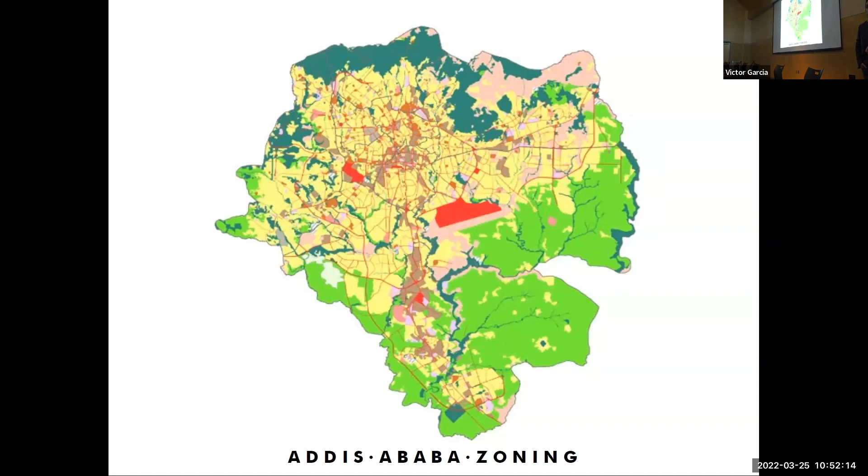But I prefer to see Addis Ababa with this image, because Addis Ababa is not like here in New Orleans, where we have just one big river. In this case, as you can see in this image, Addis Ababa has a lot of small rivers and tributaries. So this is what we call Addis Ababa River City, and that's what we will work on.

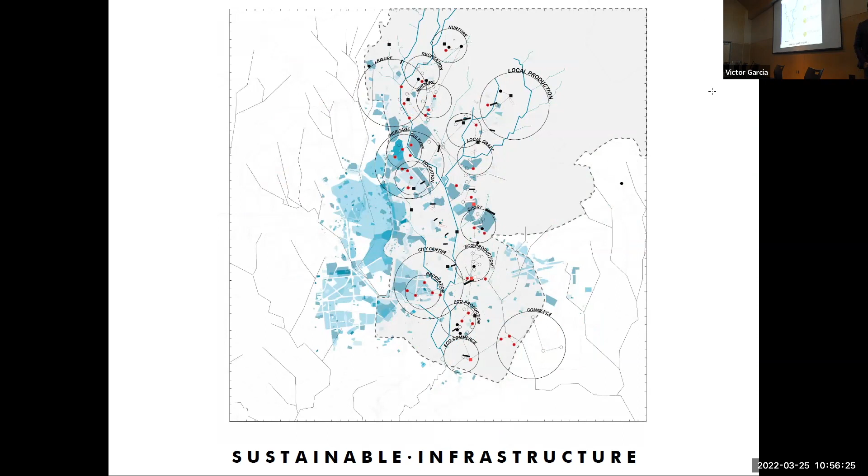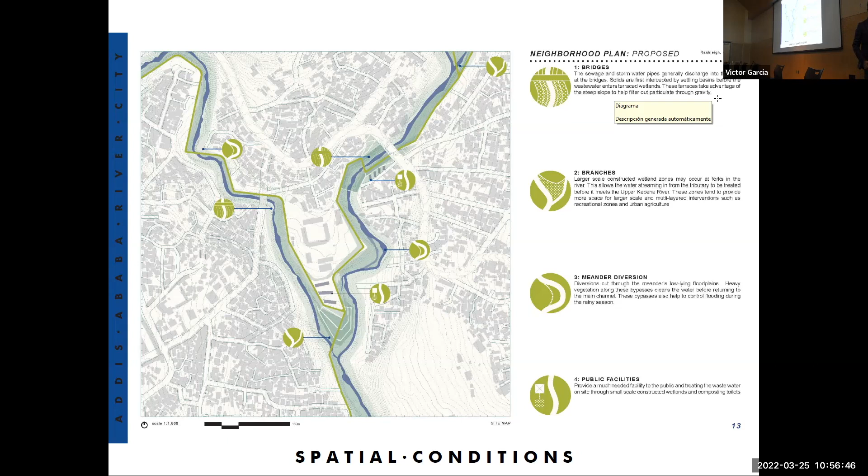That's why in the next step we designed a strategic plan for the Upper Kebena River project. Then, in a following step, we also designed some urgent interventions at critical points along this river. We focused on four different spatial conditions: bridges, branches, meanders, and public facilities, which in this case will be green and blue infrastructures in a more urban condition.

Just a couple of examples to show you the work the students did this last semester. This is one network of blue and green infrastructure we designed for a specific part of the Upper Kebena River region. The idea was first to address some of the urban issues we highlighted at the beginning in the diagnosis.

In this case, specifically urban flooding and water scarcity. The idea is to redraw the streets, remove some lanes currently used for cars, and give more public space and space for pedestrians, while also designing a blue and green network that can absorb urban flooding and, in a more natural way, send it into the natural cycle or directly to the river.

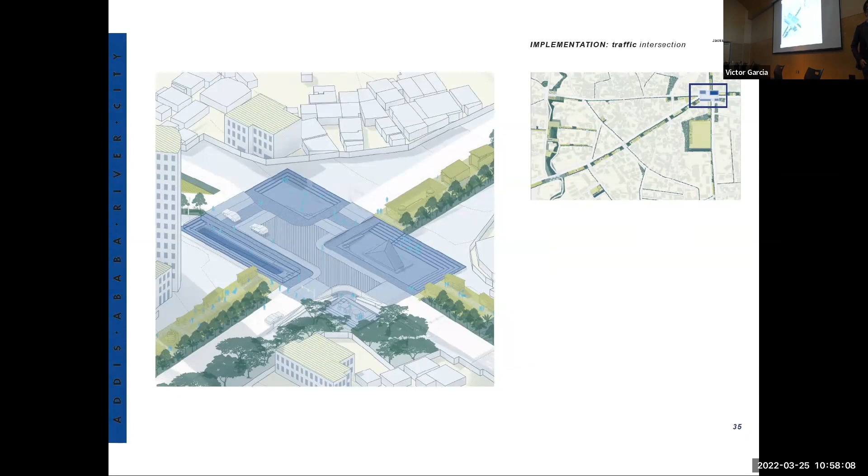There are some nodes, for example these water plazas, that can be public space when we don't have rainy moments, but can also serve as collecting spaces for water that we can then slowly clean and send directly to the river.

There are also other spaces, urban pockets, where we can implement other basic facilities, since the city of Addis Ababa has a lack of public facilities. In this case, it's a soccer field because one was already there. What we're trying to do is gather and collect water from there, clean it on the edges of this soccer pitch, and then slowly send it again to the river.

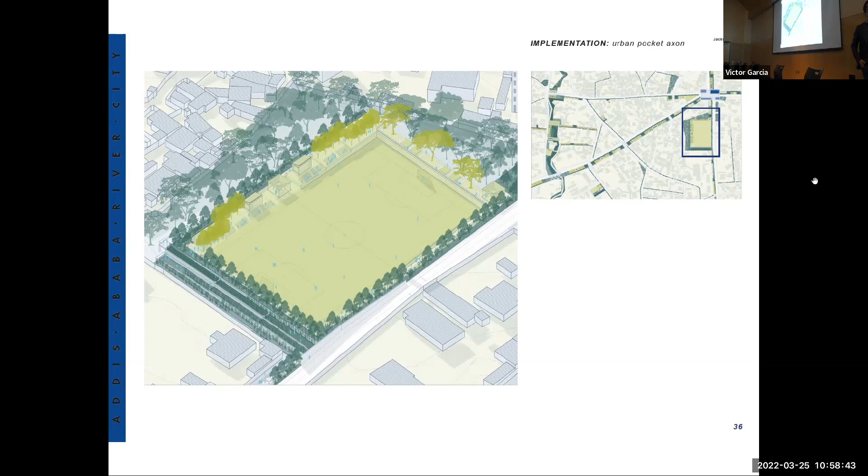And then, as we get close to the rivers, with a natural-based step situation, we try to clean as much as possible of the water we're collecting from the urbanscape before we send it back to the rivers.

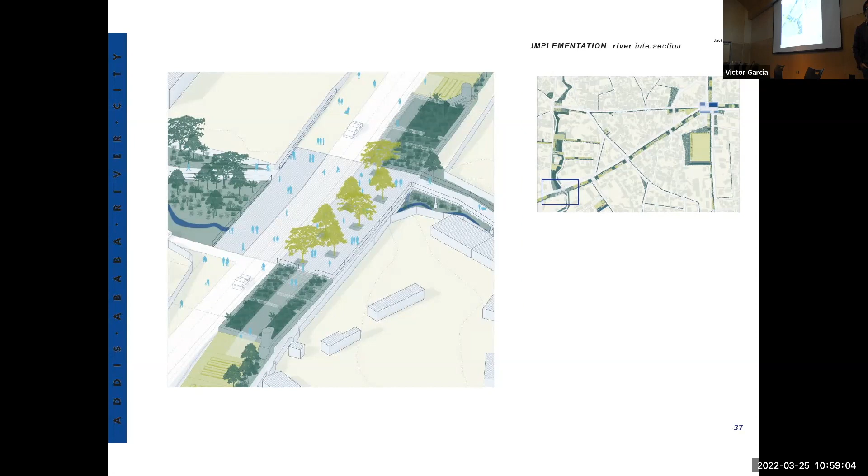Another idea is to bring public spaces, facilities, and activities close to the river, because nowadays most of the city turns its back to the river. We wanted to flip this situation.

This is another example, the second one I'm going to show you. Here the main idea is to address connectivity, because in many cases, due to a lack of a greater number of bridges, neighborhoods that are very close in physical distance are actually very far from each other.

So in this case, we designed this hybrid infrastructure that is at the same time a bridge, but also absorbs part of the housing we are going to relocate, since some of it is built in the buffer area and is in danger, especially during flooding. It also includes a market to give citizens an economic component.

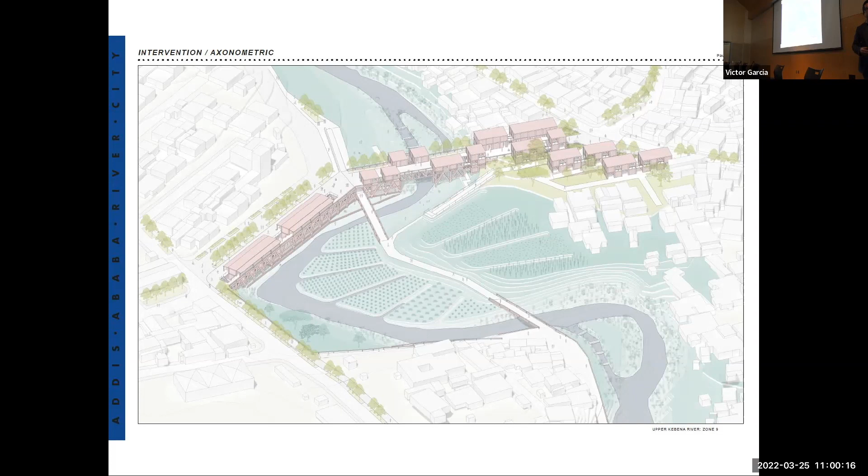Also some urban agriculture that can absorb part of this urban flooding and clean the water. Just some images to show you this other proposal from another student.

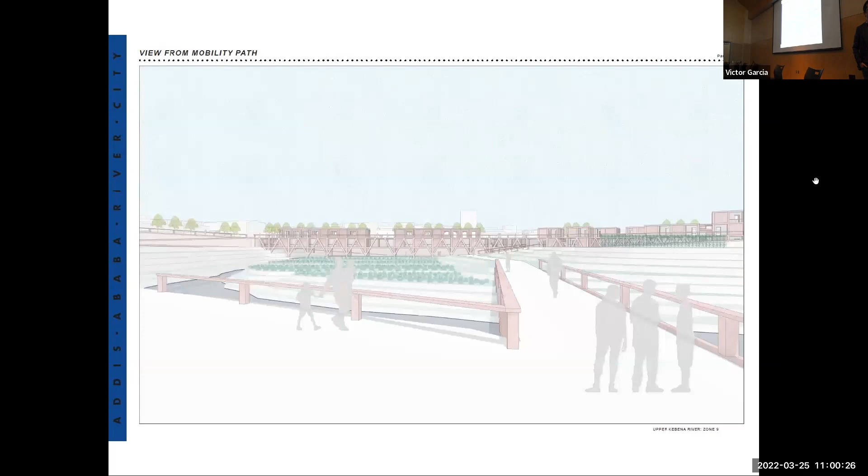A very last photo to tell you this is also part of this research studio of the Sol Means Global Studios, and there is a grant that allows us to travel to Ethiopia. This was just two years ago, before the pandemic, but hopefully the situation will change. I want to highlight that with this studio there is also an opportunity to travel, visit, and have direct contact with the problems we work on in these research studios. Thank you.

Good morning, everyone. Today I'm going to present the following research studio, which is the future of urban ports, and it happens here in New Orleans.

Before that, I just wanted to present myself a little bit. I'm an architect, trained as an urbanist, and I work in landscape architecture as well. I teach at the School of Architecture, and I have an office open in Barcelona and New Orleans, doing several scales of projects from architecture to landscape. I teach research studio, collective housing, and site strategies.

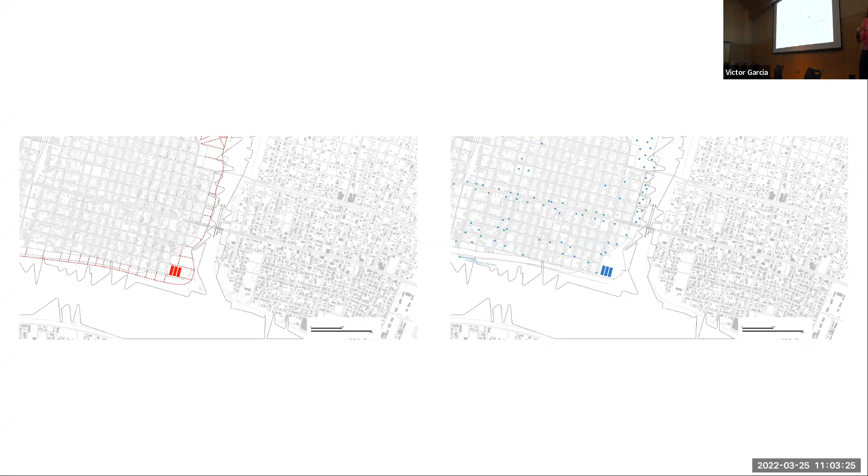In terms of just starting off with an example of a project in the industrial canal of New Orleans, we study, as Ruben was mentioning, the urban scale. We do diagnosis of the places, and then we propose architectural projects that manifest at the detail of what you can see here, which is a 1 to 200, and even in some cases more detailed.

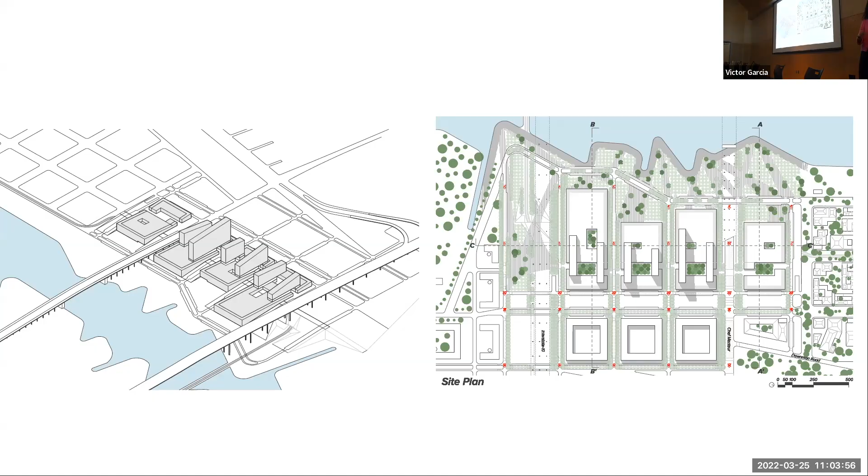So that's a sewer facility that is combining residential with processing of waste, for example. We touch on infrastructures, how to redesign infrastructures and integrate them into the urban context. Again, this is based on practice.

I'm going to show just really quickly four slides related to the work we do at the office. We have four different lines of design research.

We call it cities and rivers, where we push the cohabitation between cities and floods. For example, we've designed a bullfight arena that gets flooded and unflooded in a safe way, and a large park of 300 hectares, a water park, where you have seven buildings we also built, some in the lower south part that can get flooded and others in the northern, less flooded area. So we have this cohabitation, stressing cohabitation between architecture and public space with floods.

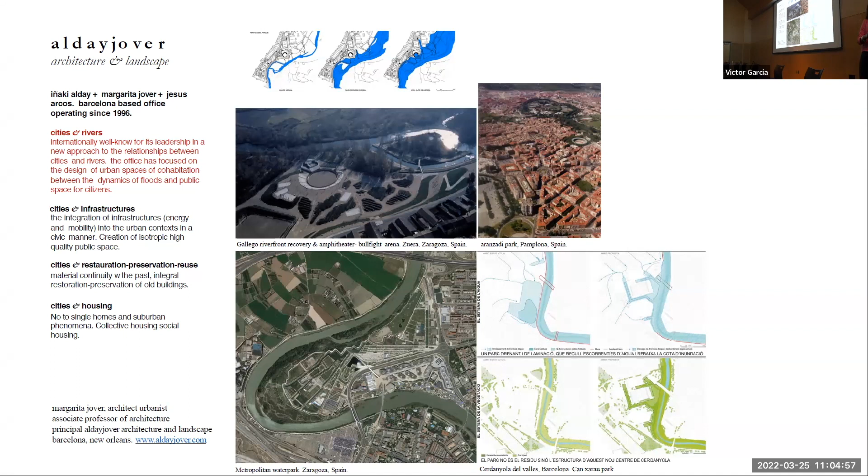That is more and more common even at the scale of regions. It's something we've done in our office over 25 years of practice in that sense. We're trying to push architects into looking at the environment that way.

The second line of design research is cities and infrastructures. Same thing, cohabitation, or integration of tramway into the city, and how is that possible? So how several modes of mobility, like bikes and buses, etc., can cohabit in the same space in a safe way, meaning increasing civism in the public space.

So we've done integration of tramway and several parks and projects at this scale, as well as, at the bottom right, you see the power plant—a power plant that is also a public building and a video art center. It's a facility that doesn't exist until now.

It's an innovation in design in the sense that it's a facility that produces heat and cold, but it's also a facility that manifests the way it performs to the citizen, informing that it's generating heat or cold through its skin, an interface with a video art center—a collection of video art meant to communicate that, and it's also visitable.

The integration of infrastructure is really important if we want to understand that there is no citizen of first class, second class, or third class, because all infrastructure needs to be safe and beautiful for everyone to look at.

So that's an architecture innovation, to have this power plant that is visitable, and it is this video art center that is performing this way.

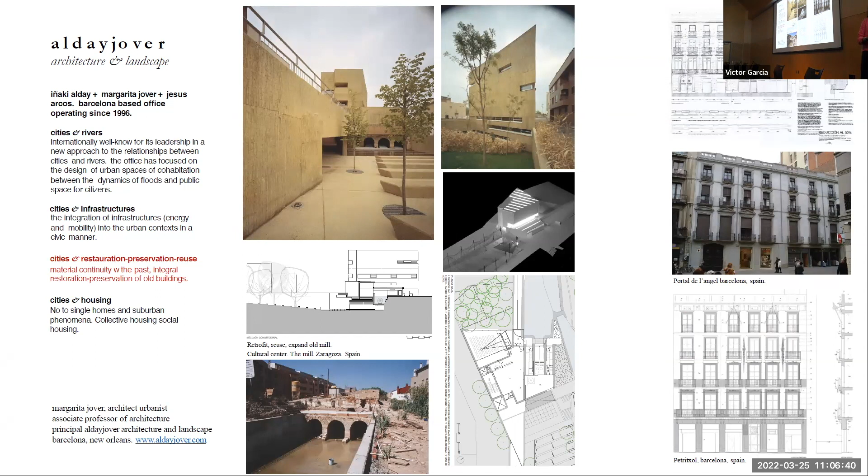The third one is cities and restoration, preservation, reuse, retrofit—all these strategies taught in school and in several studios. The idea of reusing in a creative way is a field that will grow and grow. We have here a transformation of an old building into a civic center, reusing part of it.

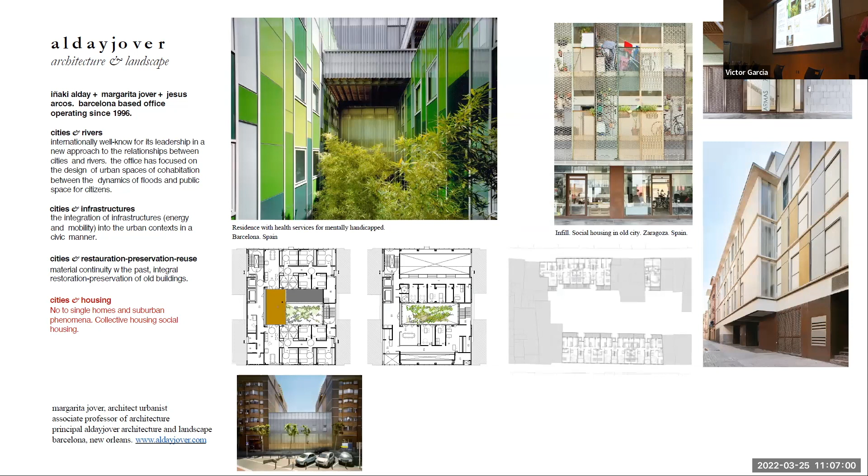And then the fourth one is cities and housing—collective housing and collective spaces. So it's this gray space between public and private that is developed as our designs are promoting it. These are some examples of buildings we've done.

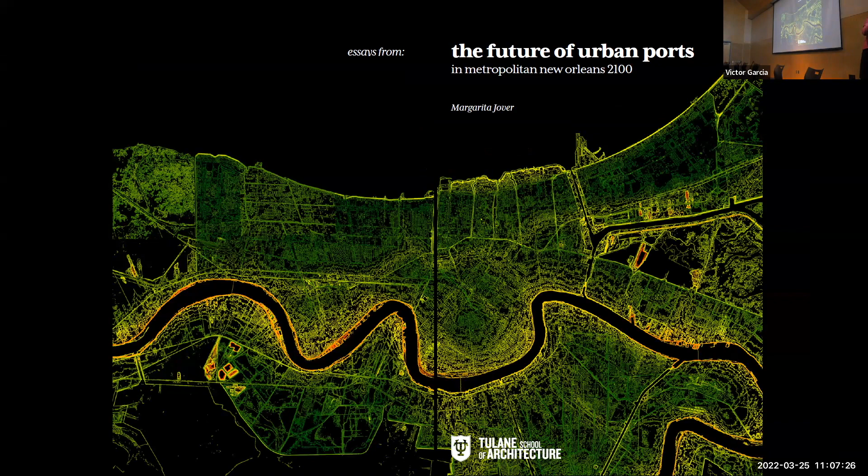And then lastly, an international competition—a big infrastructure of the green belt of Madrid intersecting with the river. With that, the future of urban ports is trying to put that in action, to teach students to analyze a large stretch of land, which is the industrial canal, this piece in yellow. It's 5 miles of land by

600 feet wide. And the idea is to imagine a post-industrial reality—imagining that the port is leaving, what is going to be the linear city that occupies that? And why here? Because it's high ground, similar to the river, and it's safe. In terms of New Orleans, the high ground is the most valuable place.

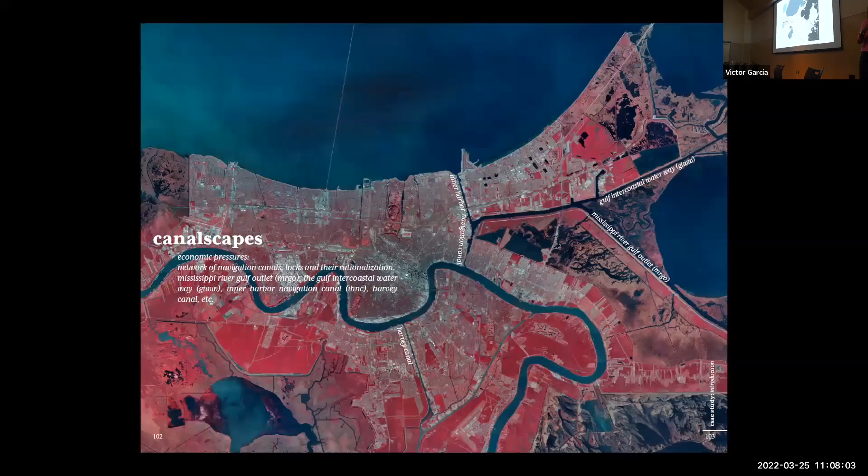So the idea is to make a detailed analysis of the place with the different waterscapes, canalscapes, industrialscapes, and then three questions about the type of port this city is. It's a container port, but also a primary extraction port of oil and gas, at different scales.

In terms of the container port, it's leaving, increasingly falling behind in its economic role. The idea is to launch potential futures to be discussed at the collective realm of the municipality and the region, aiming to produce solutions for the future, like climate adaptation plans.

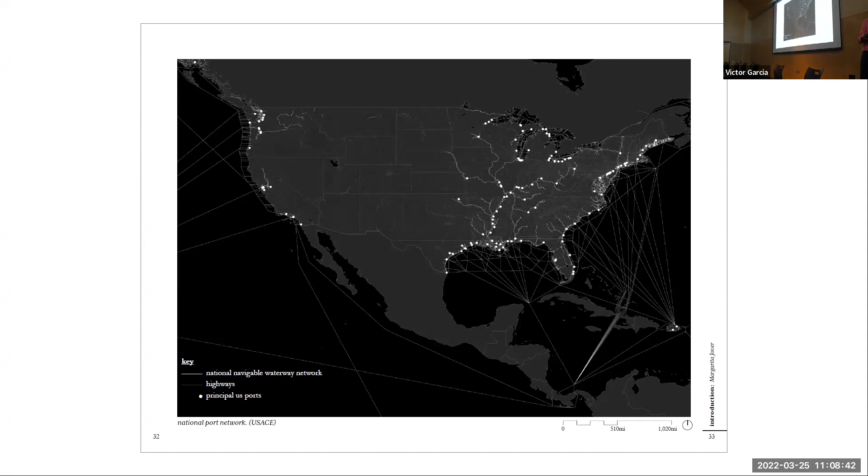So the land of the port is going to be increasingly—potentially ports are becoming more important at the coast, like Houston, Florida, the East and West Coast. So the Port of New Orleans being behind is the framework for thinking about its future.

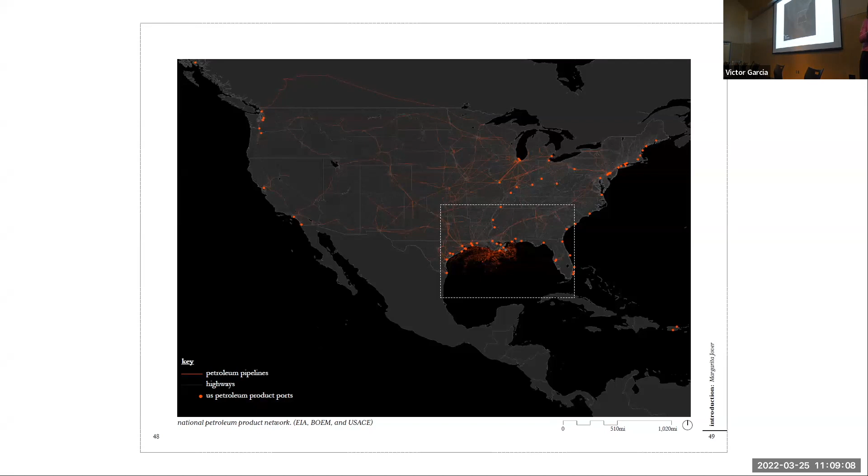The second question is the extraction port of oil and gas, which means thinking about energy transition and how that can look at the city scale.

We have this huge theme of energy and energy transition in the public agenda, in the political agenda. The aim for designers is to think how to integrate energy transition, solar and wind, at the scale of the metropolis in a way that's not harmful for people. They have references from the North Sea, where there's this energy transition

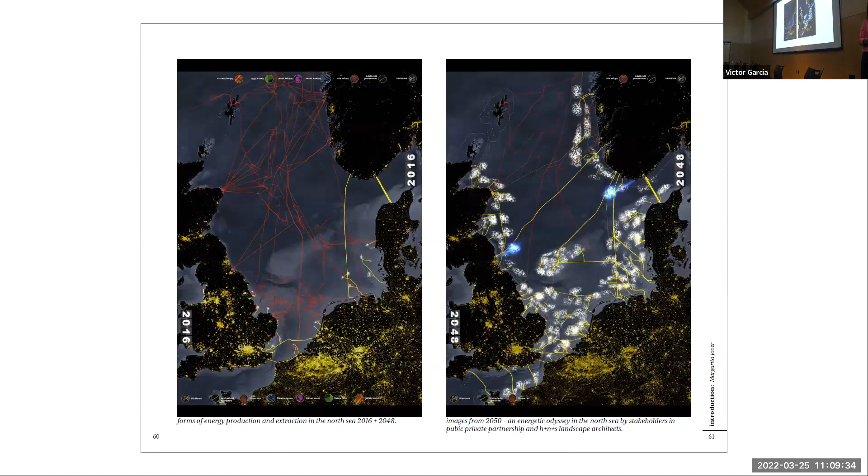big project for 2050, and we're going to do somehow the same with the region of the Gulf Coast. And then lastly, sea level rise as a theme of microtopography, with the idea of settling on high ground as a strategy for the future.

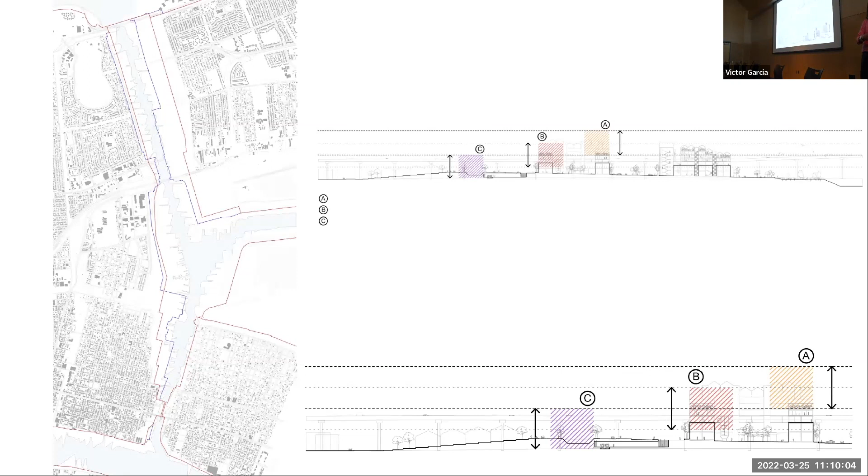And how is that densified? We have some studies of the topography of the region, getting to know the metropolis in depth, and then thinking about urbanism in section and how that's possible with the future coming up.

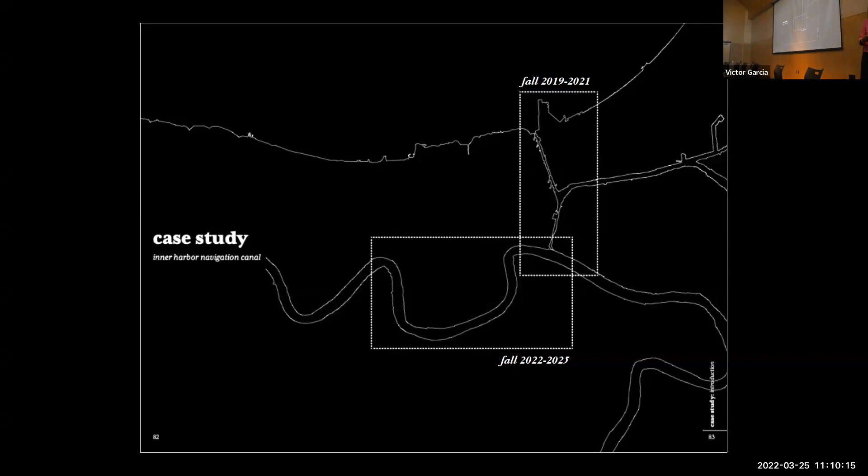And case studies—we've done this upper level, and we're moving along the river to study the same thing. And lastly, just to restate that

in addition to teaching, we have this book, Ecologies of Prosperity, that talks about socio-ecological urbanism, which I co-edited with Alex Wall, for you to check out on Amazon if you're interested. Thank you.

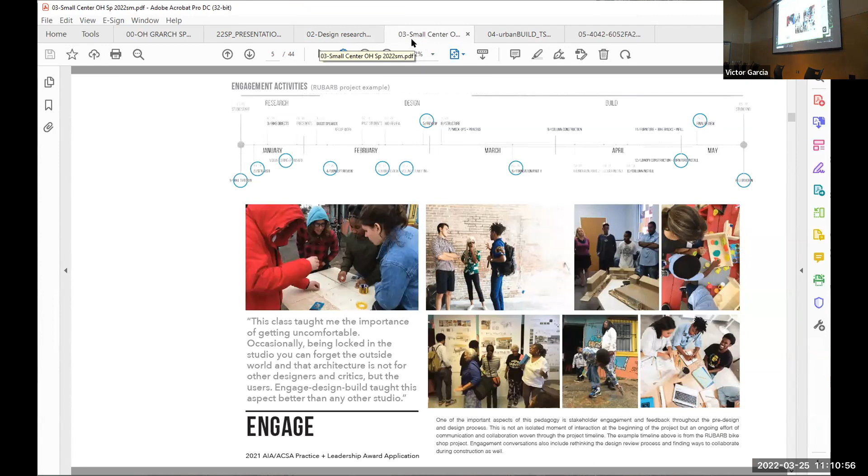I think number 3. All right. Yeah, okay.

Thanks, thanks Margarita. Hi again, you all. I'm Emilie Taylor Welty. I've already introduced myself, so I won't dwell on this too long, but I thought I would show you a brief overview of Small Center's Design Build Research Studio, and then talk about our most recent project that we just finished up in the fall of this last semester, over Christmas.

The way I'm framing this is it's an engaged design build studio. Most of our studios, as you'll see when Byron presents next, have a healthy history of design build work here at the School of Architecture. What we do in the Small Center Studio is expand that agenda to include engagement with local communities. Not that Urban Build doesn't do engagement with the community partner, but we focus energies on expanding access and pulling more stakeholders into the design of projects. We're thinking about these complex or wicked problems of our cities, and how we can use the capacity building work of public interest design practice to pull more people in and understand how we as architects can be part of a collaborative approach to these issues.

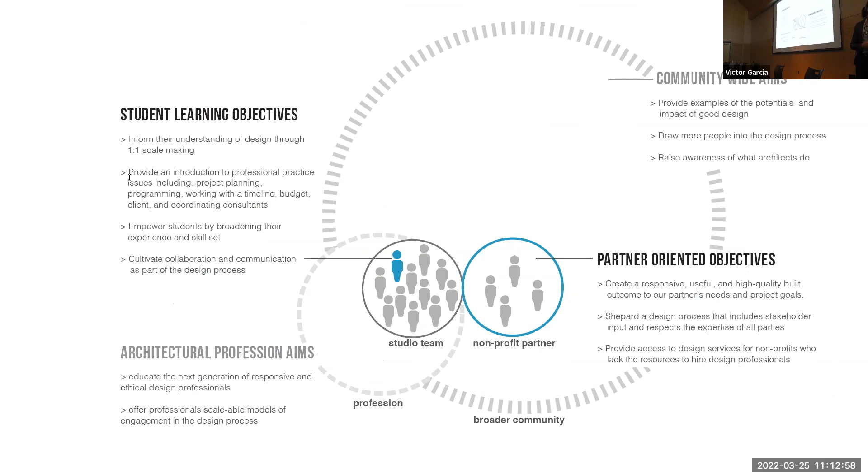I won't go too much into all of this, but we have a lot of different objectives we're looking to address in these projects. For me, the two most important things are making sure you all get a comprehensive educational experience through a design build project, and that our partner organization gets the outcomes they're looking for. So it's balancing those educational and outward-facing goals, which usually work well together, but I want to say up front it's not just about you, it's about our partners as well, making sure we're getting the most for everyone out of these projects.

On the engagement end of things, some people treat engagement as a conversation up front and then go away and design in secret before showing what they've designed. For us, it's about stitching together or weaving engagement throughout the process of design, fabrication, and celebration at the end. I'm looking for opportunities in that short 15-week semester to have lots of points of contact, bringing in outside experts and stakeholders throughout the process.

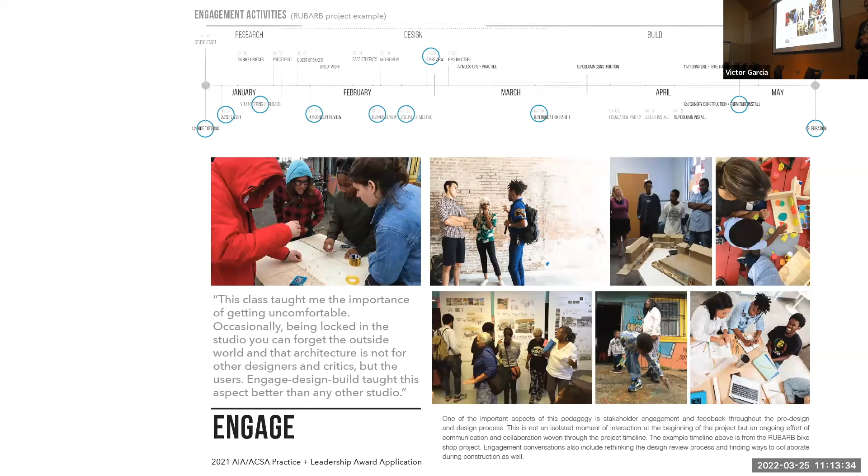And then, of course, build—it's a design build studio, so we have to make the thing. The challenge, as came up in one of the questions earlier, is that because this is a 15-week studio, the scope of our projects is often simpler or less complex in terms of systems integration and permitting than full built projects like Urban Build or larger buildings, but tends to center around pavilions and smaller projects. Sometimes they're more product-oriented, like the carts you saw earlier, the apothecarts. But in general, we've got 15 weeks from the first conversation with our community partner to a built project that's out in the world.

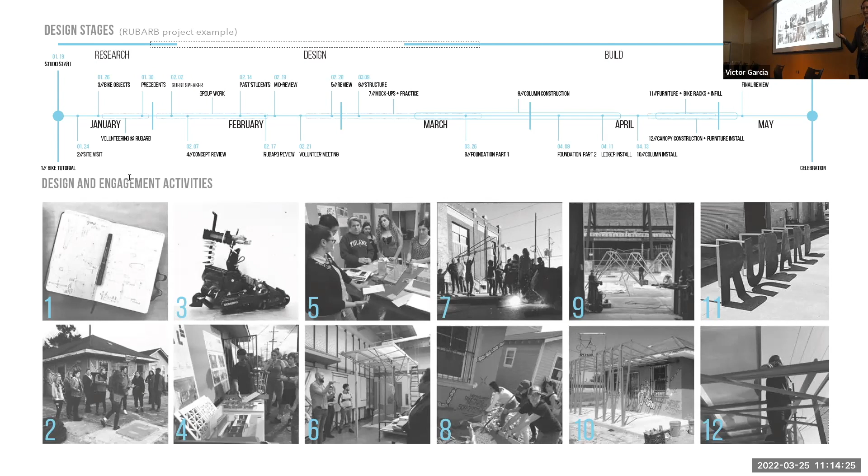So that's the brief overview of the studio agenda. I thought you all might be interested to see what some of your colleagues were doing last semester. Most of the time, these studios are a mixture of students, not just graduate students—in these advanced research studios, you'll be working alongside some upper-level undergrads. With this particular studio, a little over half the group was grad students, and we had some undergrads as well.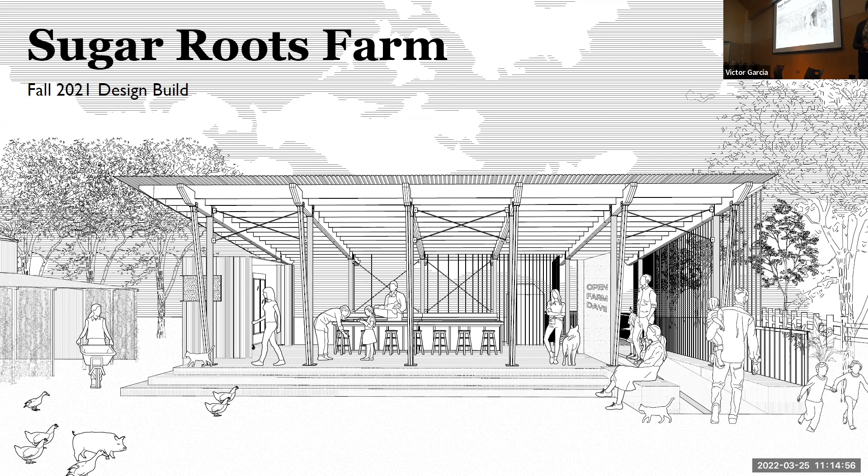We worked with Sugar Roots Farm, on the west bank of the city. It's a piece of land where they do a lot of farm-based education, especially for children in the city. City kids don't get a chance to interact much with animals, farm animals, growing processes, and understanding food systems—like where does our food come from. That's a lot of the work that happens at Sugar Roots, as well as advocacy around food sovereignty, making sure communities are healthy and functional in a way that doesn't rely on all the bigger systems around us.

When we do these projects, we focus on early readings and exercises, often revolving around social justice and design and how these two overlap, what impacts we can have in the design world, and how we can collaborate more holistically to advance these agendas.

In the middle of the early design phases of this project, Hurricane Ida passed through the city and did quite a bit of damage. So we pivoted and dropped everything for a few weeks to help on site with post-storm recovery. They had a lot of structures down, a lot of issues on the farm, so we put down our pencils for several classes and just went out there to help, to be useful. In the process, we learned more about the farm and its functions and day-to-day needs, which helped us fold that into the design.

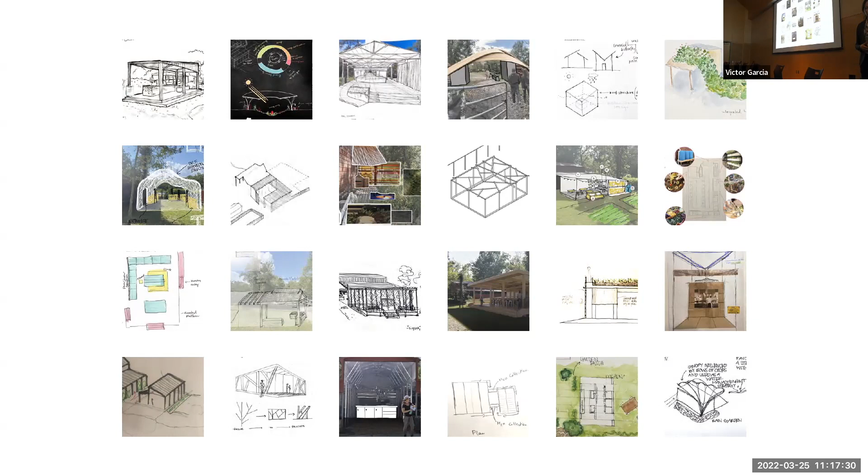And then the hardest part, I'd say, is going from a lot of different ideas down to a single idea in a collaborative setting. So you'll see here some early sketches that started to get whittled down into different agendas, overlapping agendas, down to a couple of proposals on the table.

And then the final scheme, which I'm showing here, is a large covered outdoor kitchen space. That was really what our partner needed, was a space to have cooking classes and also entertain school groups that were passing through. It's hot. New Orleans is hot.

They needed a large covered outdoor shady space that they could do some programming in, but also, as we were there on site, we noticed a lot of issues like flooding and some other things that this project could address.

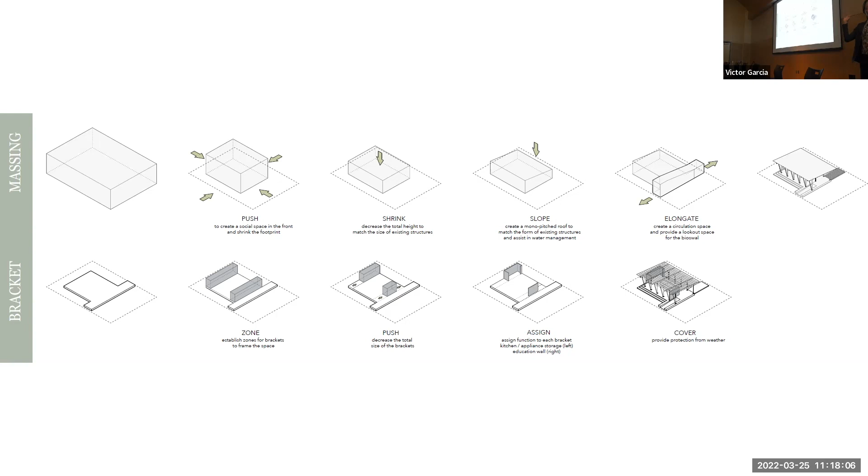I won't go too much into the schematic or diagrammatic approach, but you can see here the final plan of the project that was built. It's about a 30 by 40 foot outdoor classroom space.

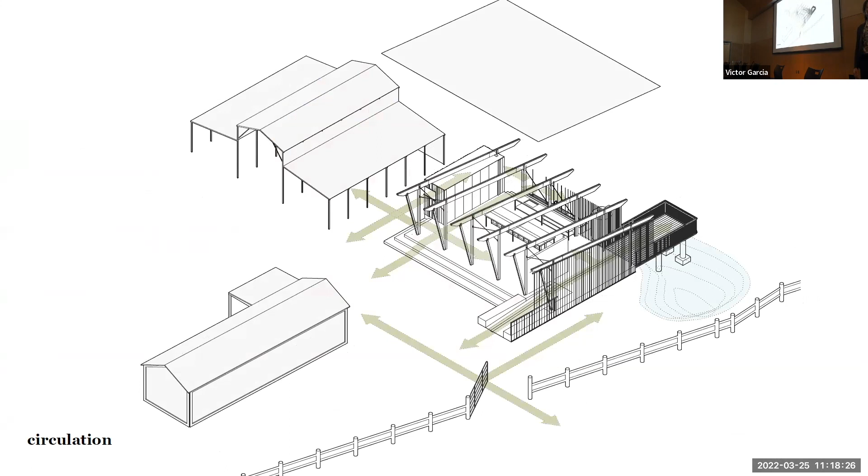There is a large swale that's collecting the rainwater that falls on site and alleviating some of that stormwater issue I was mentioning. A few quick diagrams - I won't linger on a lot of this, but here you can see some of those water management strategies we're thinking about as we're working through the design process.

I think one of the challenges of these studios is figuring out at that point how to build this thing. The fact that we're building it is definitely woven into the decisions we're making as we design, but the students themselves are self-organizing and figuring out how they're going to divide the labor to achieve the final project. So these are some of their behind-the-scenes drawings where they're thinking about

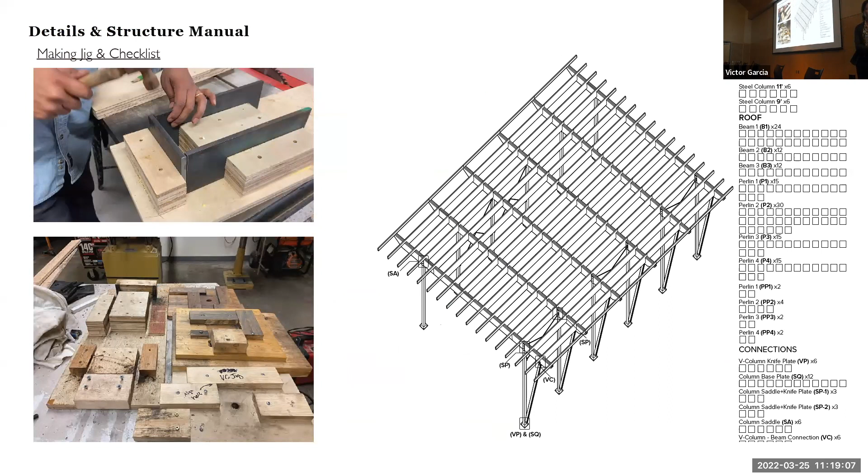what needs to be made, but then also a schedule here on the right of all the pieces so that as they're working in the shop at different times, they can be checking off what's been done, what needs to be done, making jigs. Typically in these studios, the design is the first half of

the semester, like getting to a design that we can permit. And the second half of the semester is really focused on fabrication and looking for ways to innovate within that space as well. And so here you see some shots from construction.

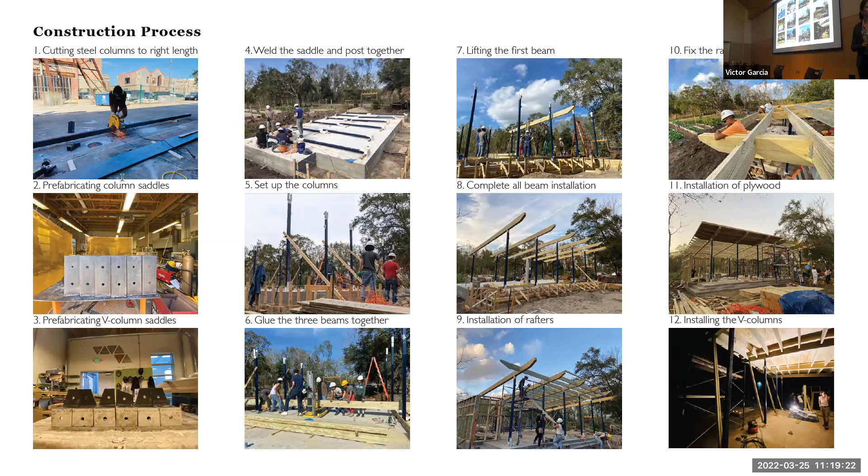I won't go too deep into all of that, but I did want to show you - one of the questions people ask is, after we submit for permit, what am I doing besides just building? And there's so much more to do. So we divide students into other teams, smaller teams that are focusing on issues.

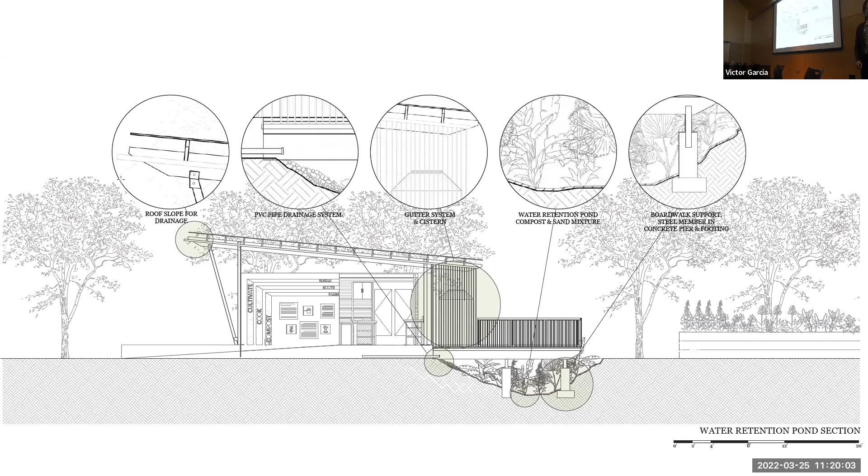And so here you see some of the diagrams of that team. I won't go into all the teams, but I just wanted to give you an example of how design is continuing throughout the build process as well.

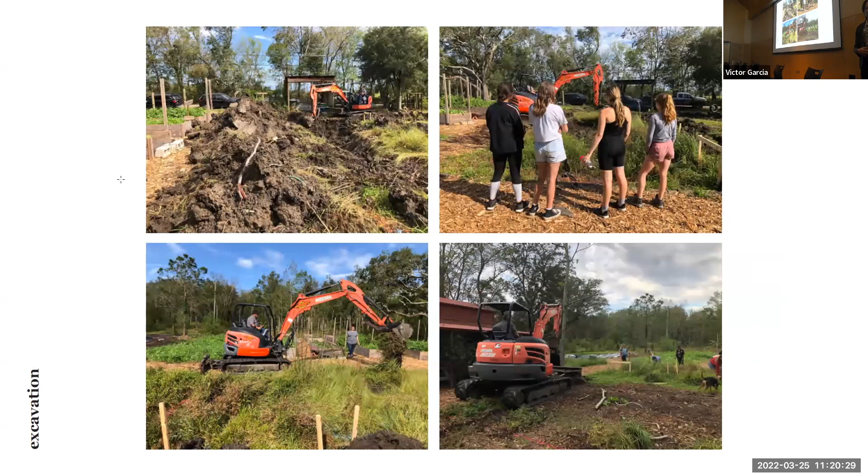They're thinking about depths and how much water we could reasonably manage on this site. Also, what's getting planted at different depths, some of these indigenous plants, and some of the qualities of the space they're after as they're thinking through these more technical pieces of the process. And then that team - you see some of the members on the upper right, overseeing some of the swale digging and the planting of the natives.

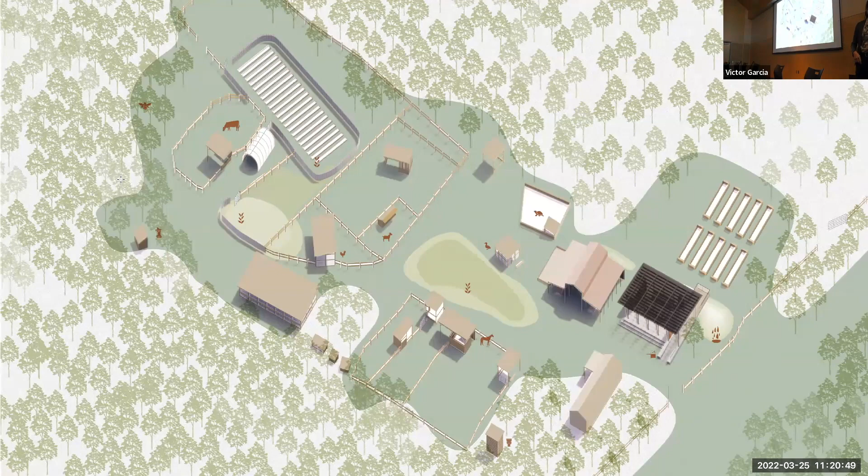I won't talk about signs, but I'll say that in the end, I just included a picture or two of the finished project. You see the little pavilion here on the right near the street side, and the rest of the farm is in this diagram. Here's the student's drawing and then how that project actually was shaping up at final review. Last week I was there, and you can see the bioretention pond is managing quite a lot of water and alleviating a lot of the flooding and usability issues they were having on site.

So yeah, it's out in the world, ready to be used. I think that's it, I'll say one quick word. This afternoon you'll meet Tiffany Lynn, somebody I'm teaching a research studio with this semester. I'm not showing you that project right now, but I'm sure she'll tell you all about it, and you'll get a sense of some other research studio work happening here at the school.

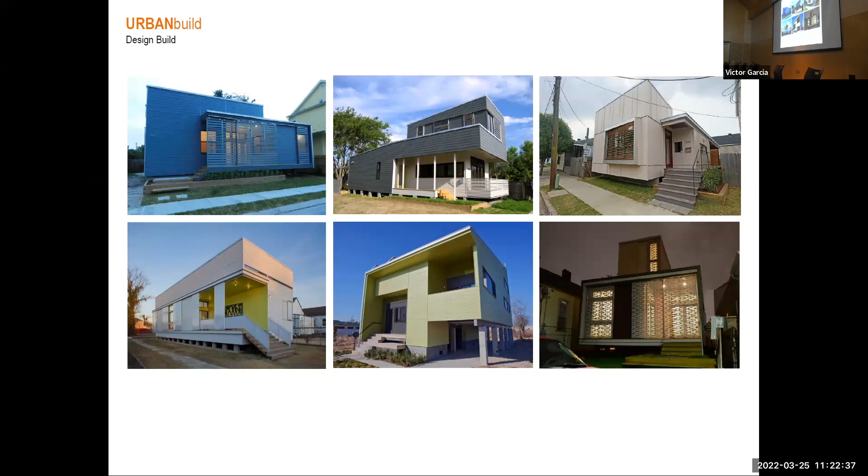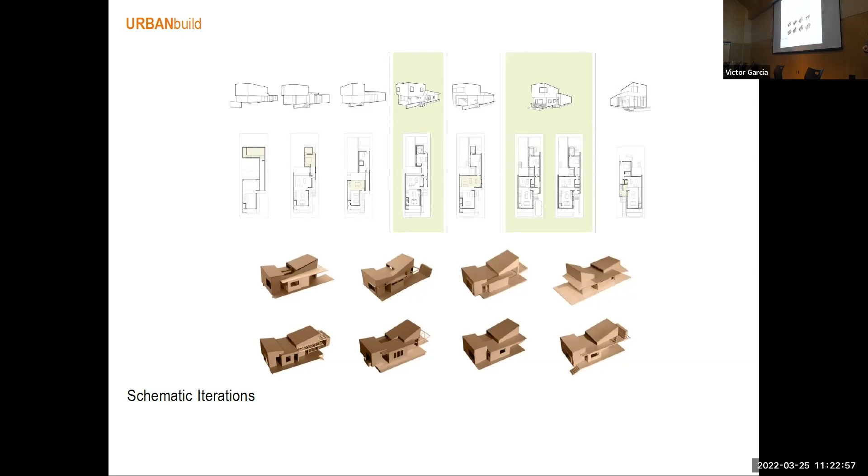It's a one-year program. Some people choose to do the full year, some do just the spring or just the fall. We always start with the design session in the fall, and we run through an iterative process where students come to the table with ideas, they're compared and developed together. We move quickly into a phase of design development, breaking students up into teams during that studio. We then quickly develop a set of code compliant documents for review and submission to the city.

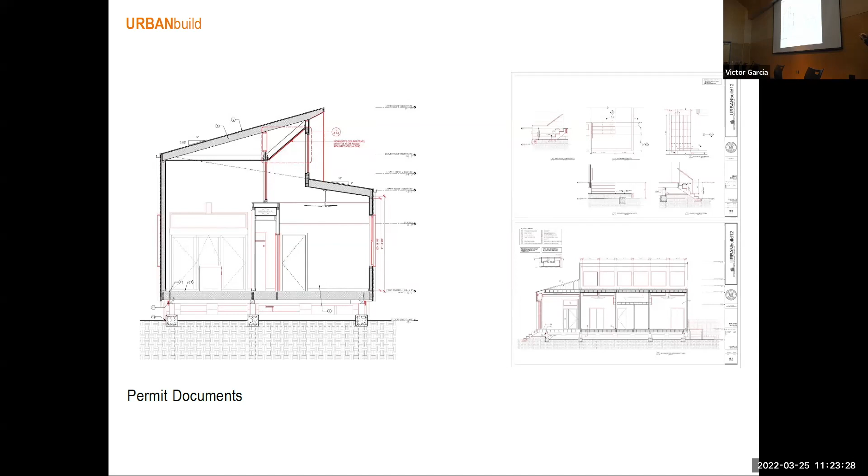So you get a taste of everything: a schematic experience, a design development experience, and then a construction documents experience. We get those documents submitted by midterm, by Thanksgiving of the fall semester, in an effort to receive our building permit by January 1st. Sometimes we get it, sometimes we're a little behind, but we always start execution in mid-January.

We've worked over the years with lots of different systems, lots of different colleagues. That's really what I'm most proud of, that students aren't just being given a design opportunity. They're learning how to work together collectively and professionally. They're learning how to work with different materials with their hands, but they're also being trained how to think. Some students run through this program realizing they'll be great project managers, some leave realizing they may be great material detailers, and some realize they want nothing to do with fabrication ever again in their lives. It really is a mixed bag.

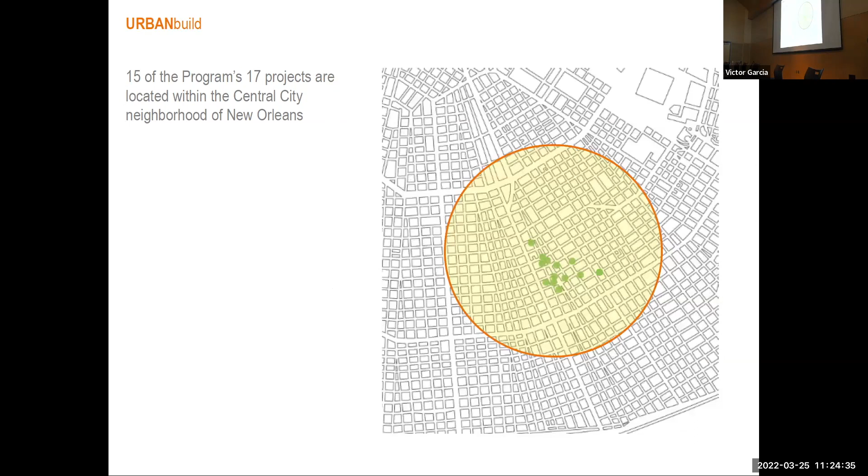So that's the overview. What's really interesting, we did not see this coming: we're in our 17th year, and ironically 15 of the 17 projects are in the same neighborhood, a little neighborhood in town called Central City. I think they'll get a tour today, huh, Kentaro? It just so happened that we worked on most of those projects with the same community partner, Neighborhood Housing Services of New Orleans.

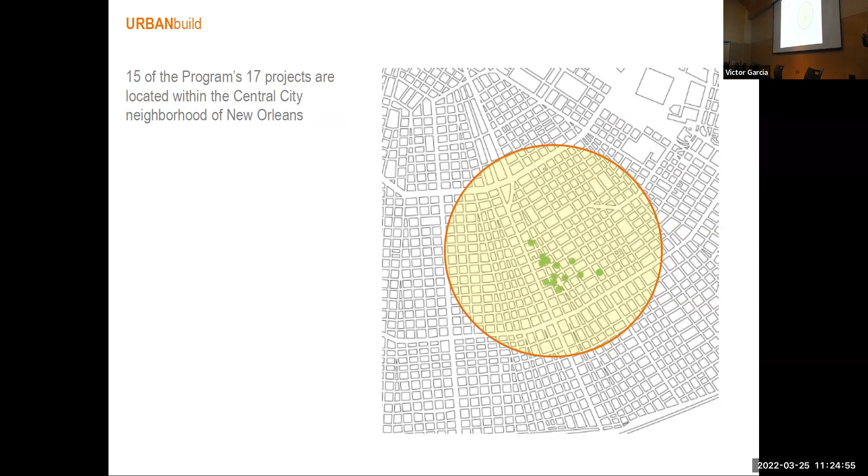They would get lots through an adjudicated process from the city, and we would find funding for the houses. Having a chance to be in one community for that amount of time has allowed us to have some impact, and in fact, I'm proud to say that the neighbors, the members of the community, look forward to us visiting each year. We have a body of work now, and the mission of the program is to maintain and continue to build upon that body of work.

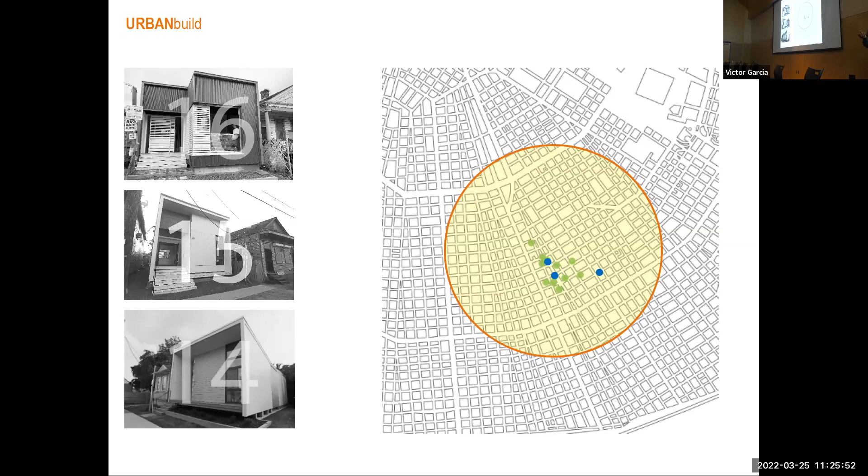You can find out more about this on the website, but I want to speak now to how we tend to work in 3-year chunks of time. We don't recreate the wheel each year; we tend to develop the next housing strategy with some dependence upon the previous one, starting with analysis and moving forward. I'm going to tell the story of how we started the recent body of research 3 years ago with project number 14, which was influenced by project 13.

The students developed this project, which was all about water management and control, with a roof form that collected the water, fed the ground, fed the garden. And in doing so, we realized that we had developed a home with no windows along the side alleys, that all of the light was brought in from above.

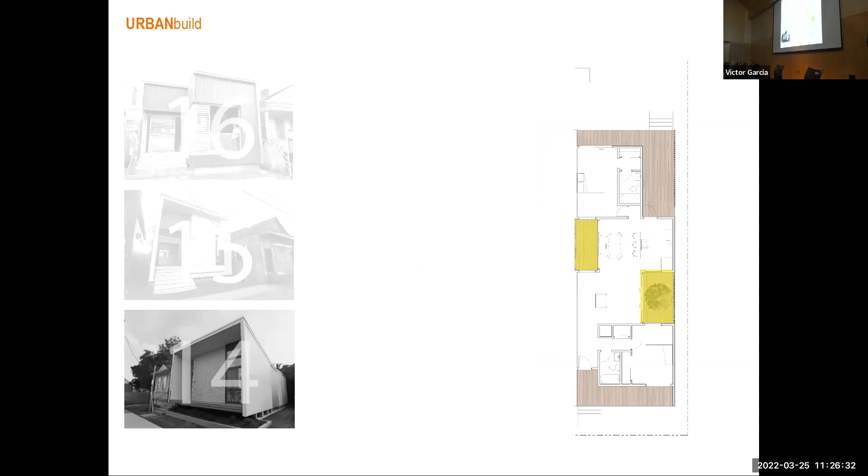One of my colleagues said, maybe there's a way for us to move forward with Urban Build by challenging the scale of our developments, that maybe we can do more than just think about the scale of a residence, or a single family dwelling. From that point on, students have never thought about developing a housing strategy, a single home, without thinking about how it might result in a multifamily complex.

So for the last 3 years, we've been thinking both internally at the scale of the occupied single family home, and then at a greater scale about how that unit might multiply over time, how it may be replicated.

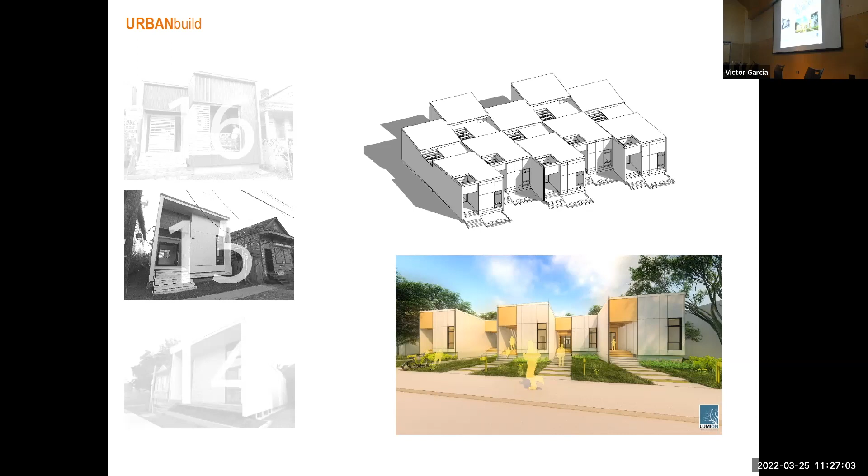And so that led to the research of project number 15, where really we thought about internal components. And we also became a bit more critical about this topic of affordability and what is a prototype. A critic at one of the reviews asked, so did you guys just make another cool custom home, or is that really an affordable prototype?

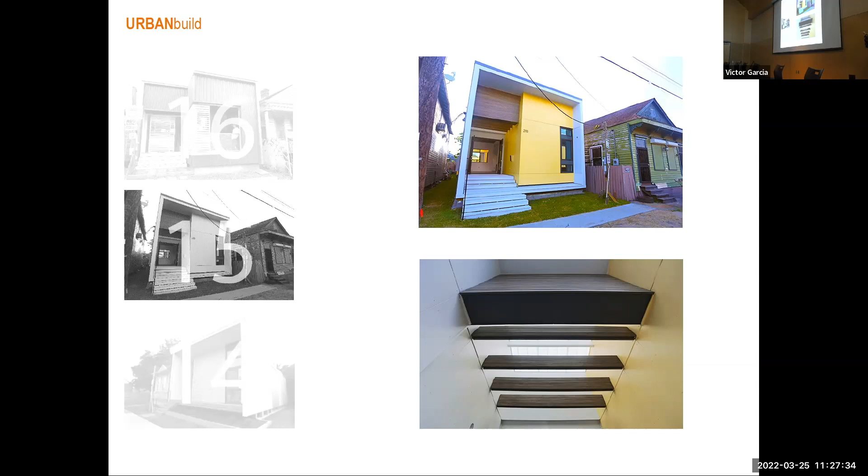That really got us thinking, like, okay, maybe we need to really challenge and reduce our scale of approach. But nonetheless, we still want to make things well and make spaces that are worth occupying. Light is important, materials are important. But in a nutshell, this scheme, number 15, consisted of 2 party walls in the interior spaces.

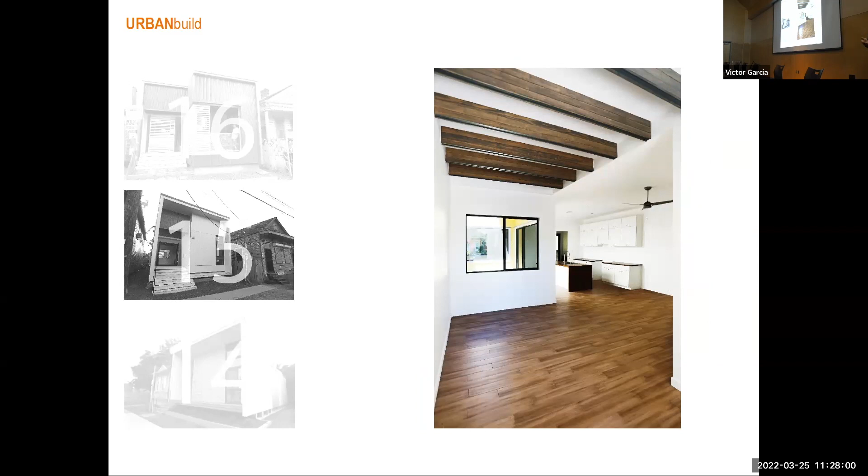All of this work is done by the students. The students build everything except for what we need licensed tradespeople to do. We can't run electrical or install plumbing or mechanical. But they do the foundation, we frame it, we roof it. I do get a team to hang the sheetrock, that would kill us, right? So they come in and they do that.

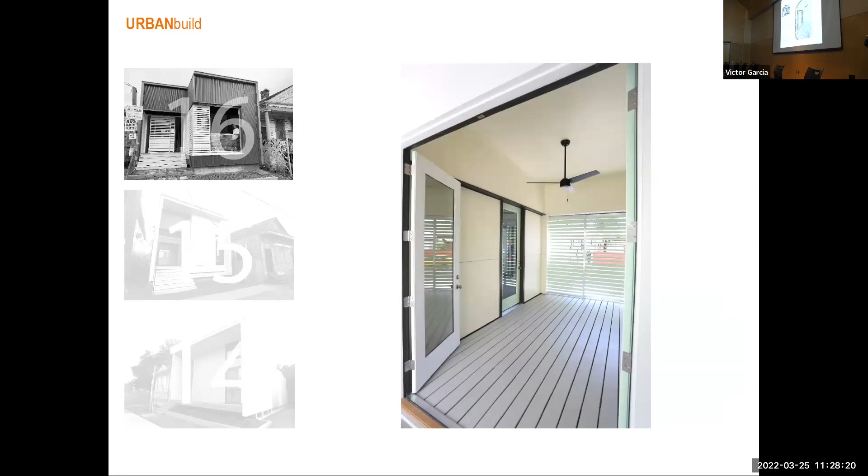But moving forward from 15 to 16, we wanted to build upon those accomplishments. And number 16 is interesting because we really blew open the guts of this scheme. Like okay, let's really think about this strategy we developed with reliance upon this internal light core, and how do we really make that special?

So we reduced some components, simplified the form, and brought light in through the center, dealing with the front facade in a really precise, maybe a little bit of an aggressive way, with these shutters that are custom fabricated and slide open. And still, once again, we're part of the community, and that's where it gets really interesting.

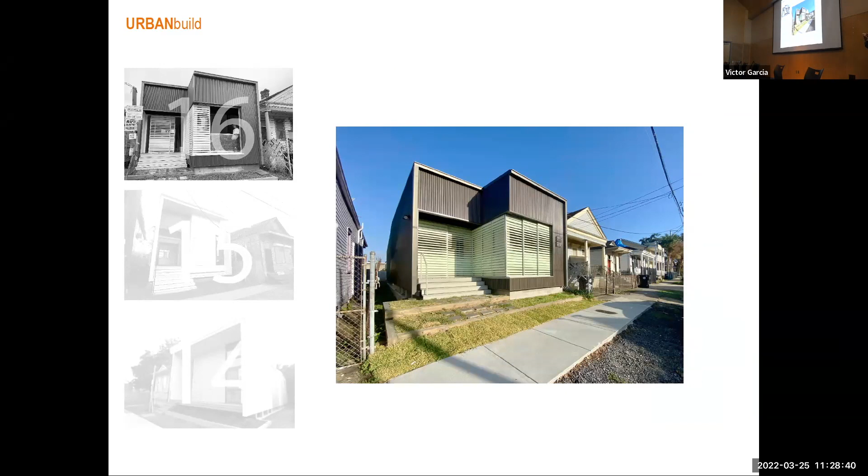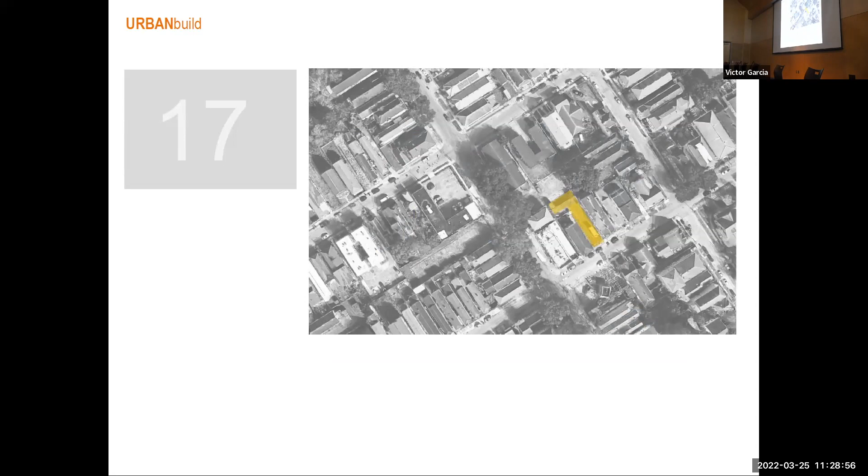Moving forward, hopefully, for the next 3 years, we have a new community partner. This is the site of the project I just showed you. This is Urban Build 16, and this is that parcel. And while working on that parcel, I got to know the owners of the buildings behind us.

He asked me one day, so when we first met, he's like, so how quickly are you going to build this house? And who are you going to build it with? I'm like, well, we're going to build it with these students in 16 weeks. And he says, wow, 16 weeks, that's kind of crazy. I'm like, yeah, what do you do? He says, well, we feed 600 people for free once a week. And I said, well, that's kind of crazy too. And we just became kind of friends, you know?

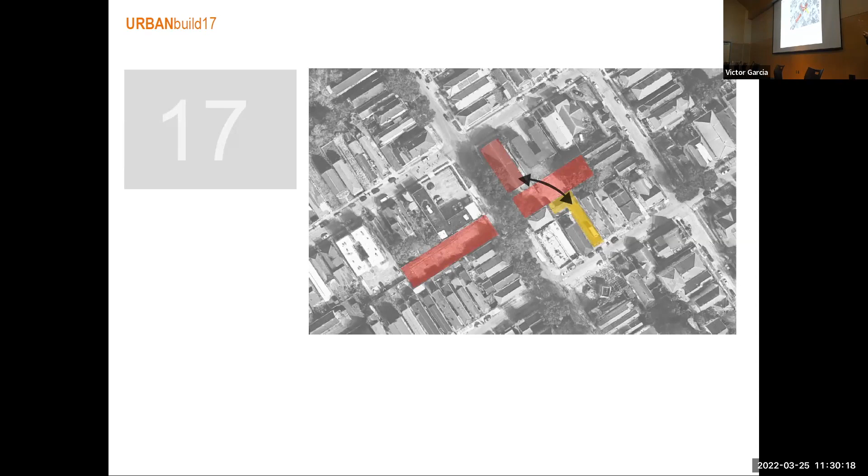And one day we're talking and he says, you know, we happen to own these 2 properties that we don't really know what to do with. And I'm like, well, maybe we could put housing on them. And he's like, oh, yeah, that's a good idea. So that's what we're doing.

We have developed with this church a master plan for these 2 properties. And in fact, this is interesting, I didn't see this coming, but the city council became aware of this project and is using it currently as an example for what's been recently approved as a new text amendment to the zoning ordinance.

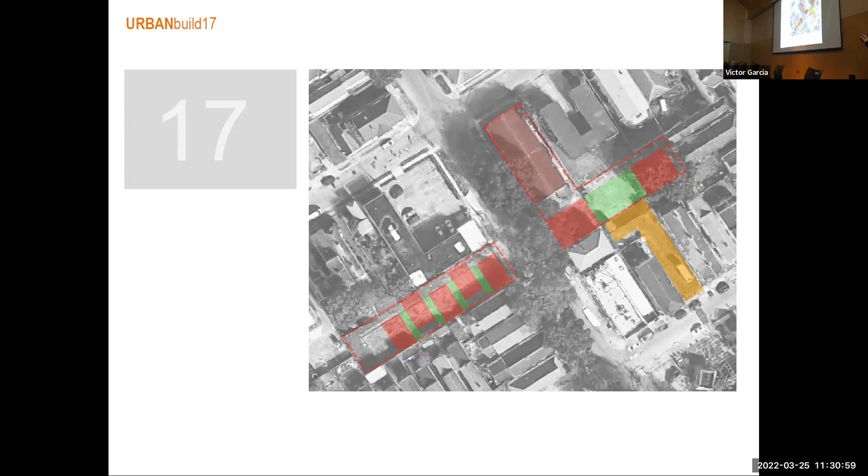Basically, they're going to use this as an example of how unused properties in the city can be spot zoned for multifamily housing, even in areas where that's not properly zoned as of now. And so all eyes are on us, right?

We've developed a 4-phase program for the next 3 years. We're executing phase 1 right now. So they'll come to the site this afternoon. I'll go back to my shop and put on work clothes and meet you there and give you a little tour. But this is phase 1 of what's to come.

We're speaking with the church about other issues as well, about money and equity and how they're fundraising for this first phase now, but we're giving them the tools to build upon the equity that's provided by our efforts. Once this project's done, they can borrow against it to do phase 2, phase 3, phase 4.

We're working to fuse this research program with our sustainable real estate development program as well, so there might be some overlap there too. I'll be around for questions and answers later and I'll see you on site this afternoon.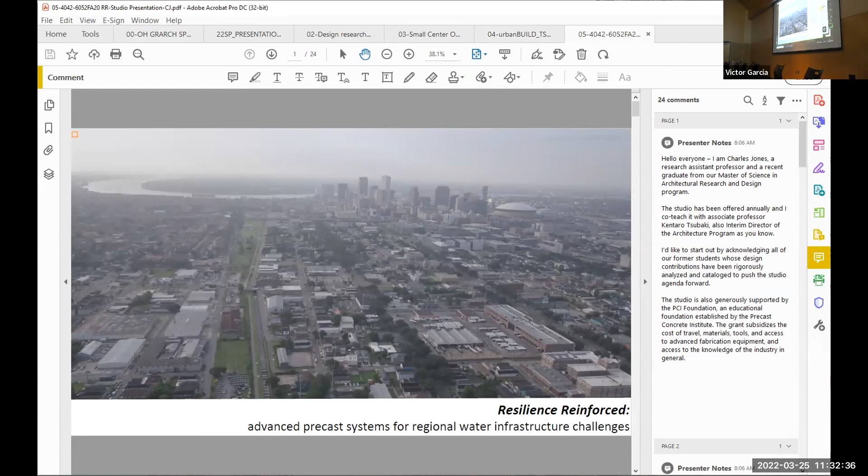Hello everyone, my name is Charles Jones. I'm a licensed architect and also a recent graduate from the Master of Science in Architectural Research and Design program here at Tulane, I guess not quite a year ago.

So this studio, Resilience Reinforced: Advanced Precast Systems for Regional Water Infrastructure Challenges, has been offered annually. I co-teach with Kentaro Tsubaki, I'm sure you all have met him by now, associate professor and interim director of the Architecture Program. Certainly want to acknowledge all of the previous student work that's been done.

This is the 4th year of the studio that's currently running right now, so a lot of the work that's been done has really helped the studio develop in complexity and rigor over the years. And lastly, it's sponsored by the PCI Foundation, an academic foundation tied to the Precast Concrete Institute. They sponsor all of our fabrication costs, material costs, travel costs, and we're very appreciative of that.

And we have a pretty clear hypothesis in the studio. We're really interested in the performative aspects of surface geometry, and precast is really the medium that we're using because it's an industry partnership, but also the aesthetics that can come out of those performative developments. And then thinking about higher degrees of functionality in the urban ground plane.

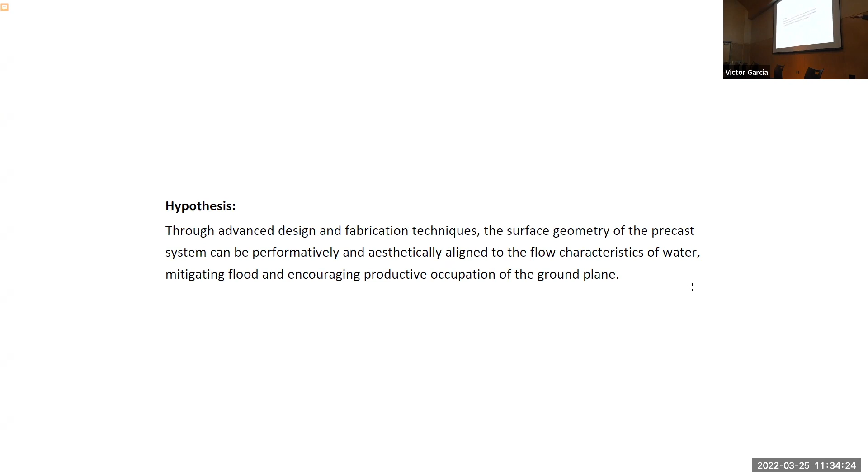So, talking a little bit about the goals of the research studio: working with students on complex advanced topics and design methodologies, really leveraging our interest, Kentaro's and mine, and expertise, leveraging partnerships with the discipline and the industry. We bring in civil engineers, landscape architects, as well as a lot of people from the precast industry, and even some folks from the site that we've been looking at for the past couple of years.

Then aligning with the school's focus as well as the university's focus to become an expert in water management in the city.

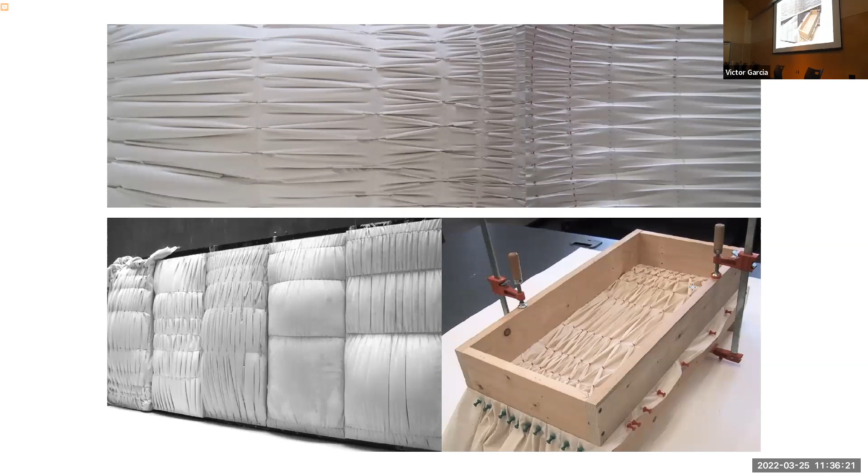And then just a little bit about some of our interests related to digital processes and materials. Kentaro's done a lot of research looking at the behavior of aggregated and indeterminate assemblies, as well as surface geometry and really complex fabric forming techniques, as well as the role that orthographic drawings and projections still play in documenting some of that complexity. Also pretty pertinent to the studio, he's got some experience in really transforming infrastructural systems into public amenities.

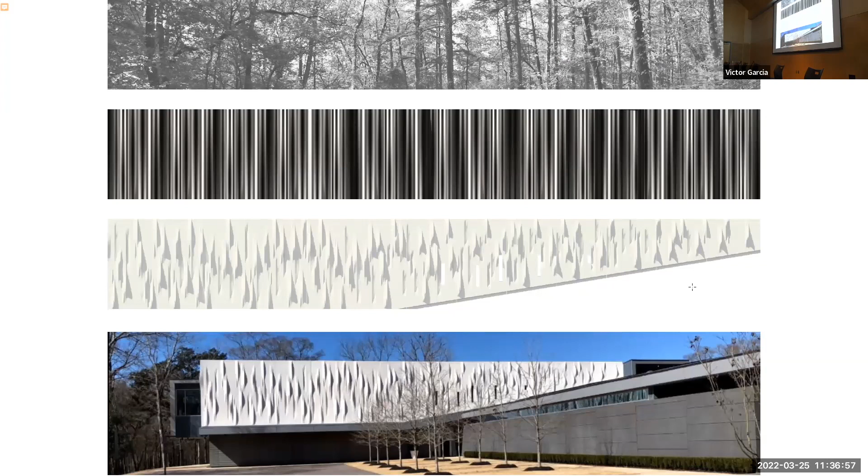And then some of one project from my former practice, which really helped us build a relationship with the industry. This is a precast facade that's essentially an abstraction of the landscape around it, redeveloped and integrated into a precast concrete system that's also looking at different ways to explore how you create variation, but still thinking about the efficiency or economy of production.

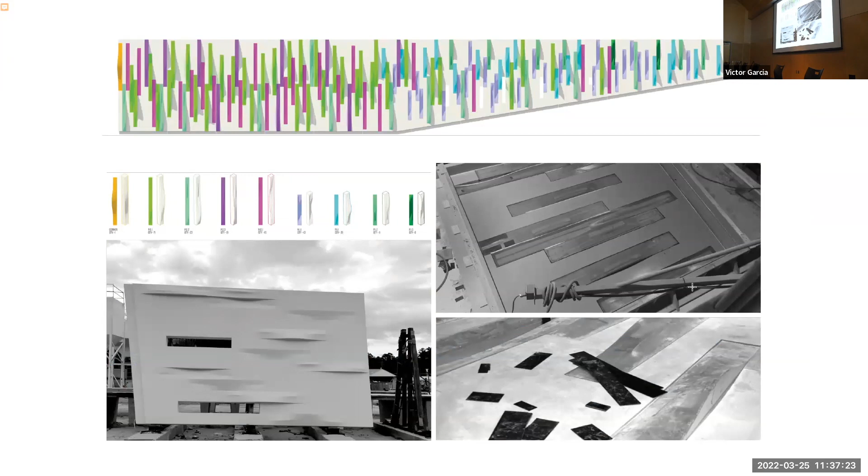And then some of my recent research, which is really looking at the future of urban streetscapes and permeable paving systems.

So again, I think there's a lot of overlap with our approach in the local context and really the overall university strategy related to water management and flood mitigation.

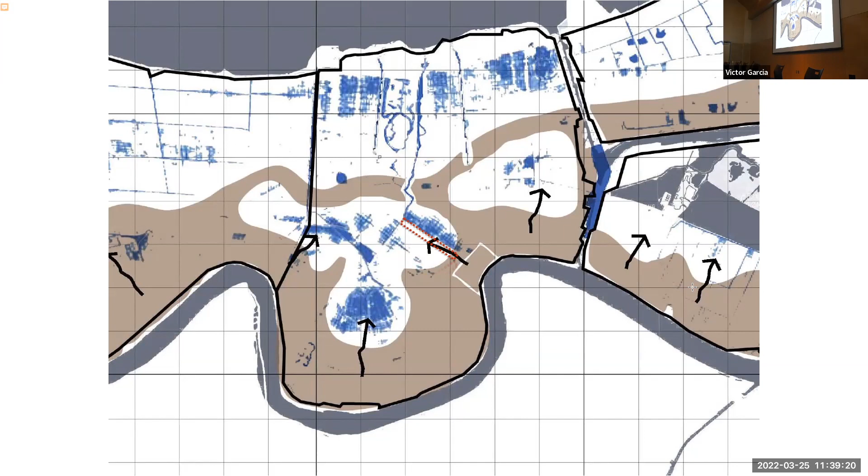But due to the fact that it's kind of built up, you can see the ponding overlay here. There was a lot of flooding that was occurring just north of the site because it essentially acted like a little ridge that ran through the city. A lot of that has actually been mitigated since we started this project, which was really all part of the plan, I guess.

And this is just an excerpt from the first studio, which was a little heavy-handed, but I think it really helped us refine the scope of the studio and figure out what's a good balance between introducing these systems and not really fully excavating out the entire site.

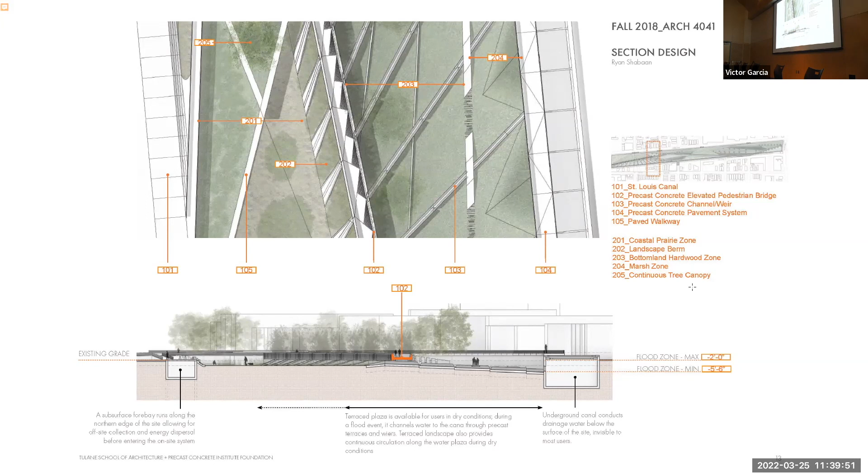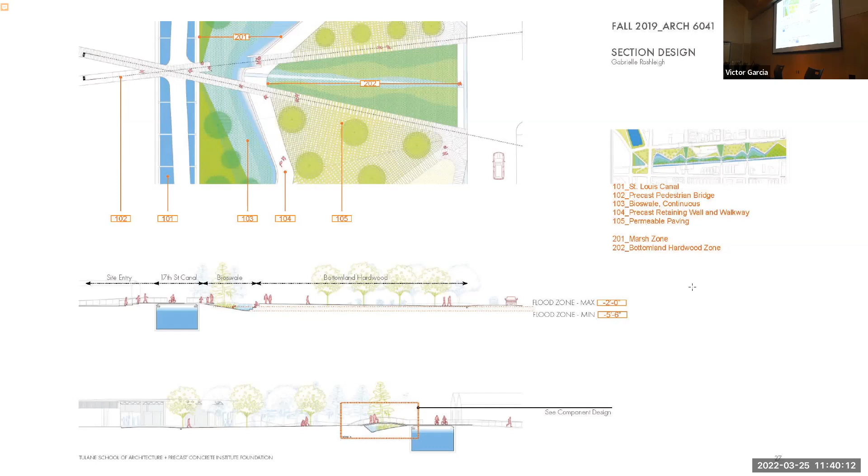So the second iteration, we scaled it back a little. You can even glance at the ground plane to see that we're not really excavating nearly as much, but here we start to really look at the surface geometry a lot more specifically, and then the development of specific precast components, because again, it's kind of like a prototyping studio as well.

And then last year, what we did was we took on this idea that the Greenway is basically like a bottleneck, and it's a major drainage canal for a lot of the quarter in the CBD area. So we looked at if we can really, as the canal is filling, expand that and take on a lot of that water to essentially relieve a lot of the flooding that is happening upstream. And we collaborated very specifically with a landscape architect in town, Brooke Morris, who's also like a water management guru. So she did all this really complex modeling to give us a real framework that we could work within.

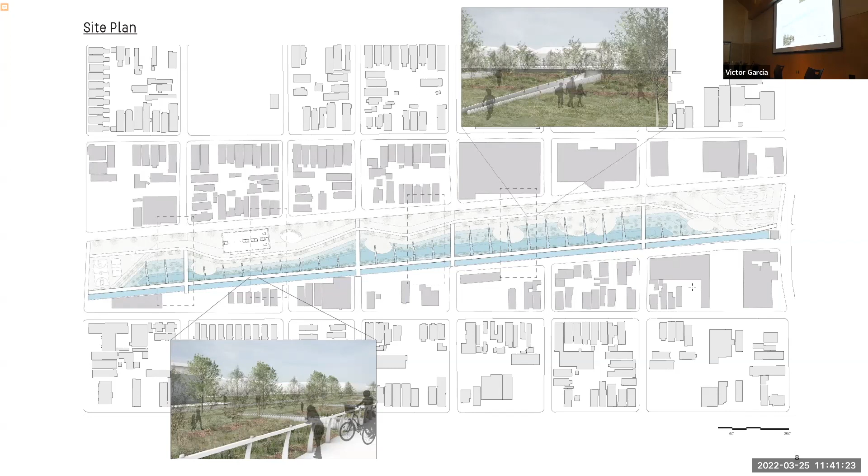And this is an example of that studio where we were then thinking about the component of how you connect to the canal. Once it overflows, how do you dissipate the energy? And then how can that really also become like a public space? Additionally, getting into some of the prototyping of that system, this is really kind of like a complex retaining wall with a lot of other functions embedded into it.

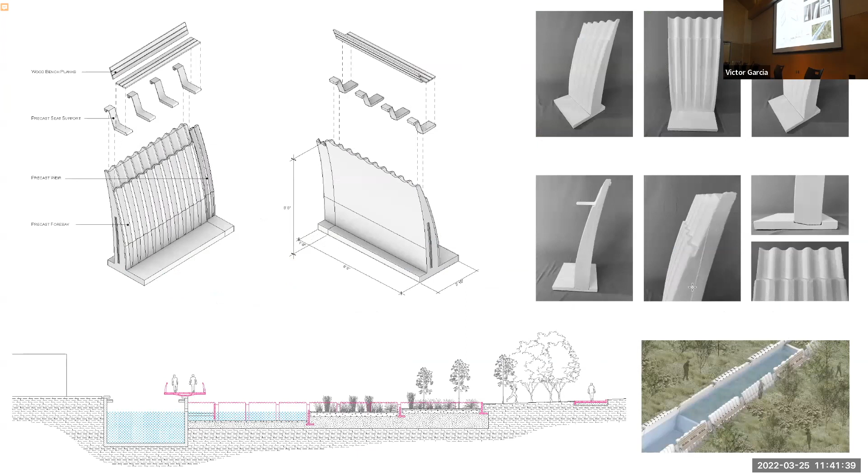And we're in the midst of our fourth year, so we've added two really interesting layers. The first being the integration of soil remediation research and strategies. The site is a brownfield because of its industrial past, so we had a workshop led by Seth Rodwald Bates. He's a landscape architect and works as an associate with James Corner Field Operations in San Francisco.

And then the second piece is really looking at the temporal qualities of water, and especially the idea of the phenomenological qualities of reflection, right? It's something that puddling really happens here quite often. So how can that start to become a major component of how we envision and represent different public spaces?

And we've been working on cataloging all of the studio's work over the past three years as well. So we hope that turns into a nice document that really captures a lot of the research that we've been doing.